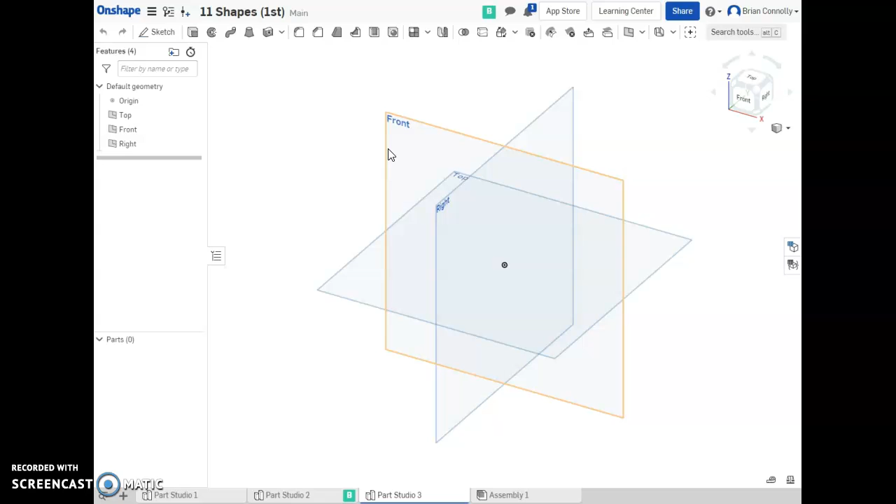So I'm going to start as we've done in the past by creating a new sketch, and I'm going to start from my front view and switch to my flat orientation so I can see it straight on. Then I'm going to just draw the base, and you don't have to make your entire part out of one sketch, one extrusion. Often, especially with a complex part, you're going to need multiples.

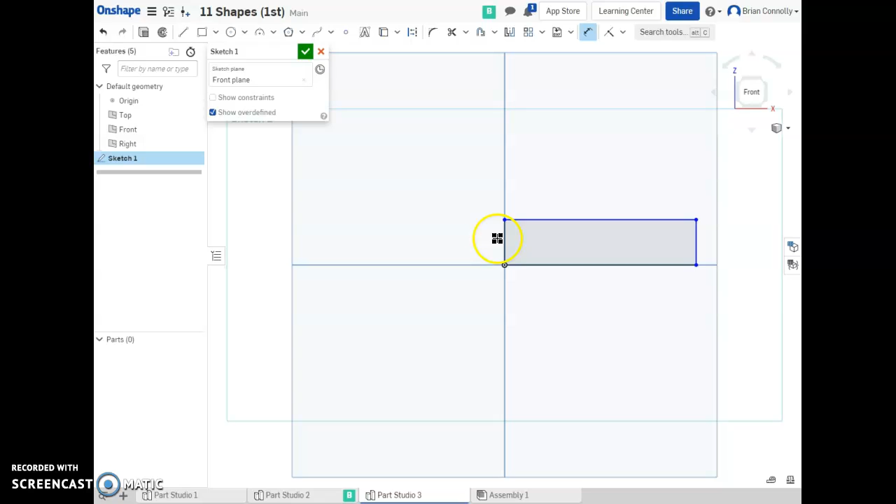And so I've got my rectangle for my base, and I know that the bottom is 0.5 in height. It's also 2, 4, 6, 8, 10 across. And so that is 2.5 inches according to my scale. And from here I'm actually done.

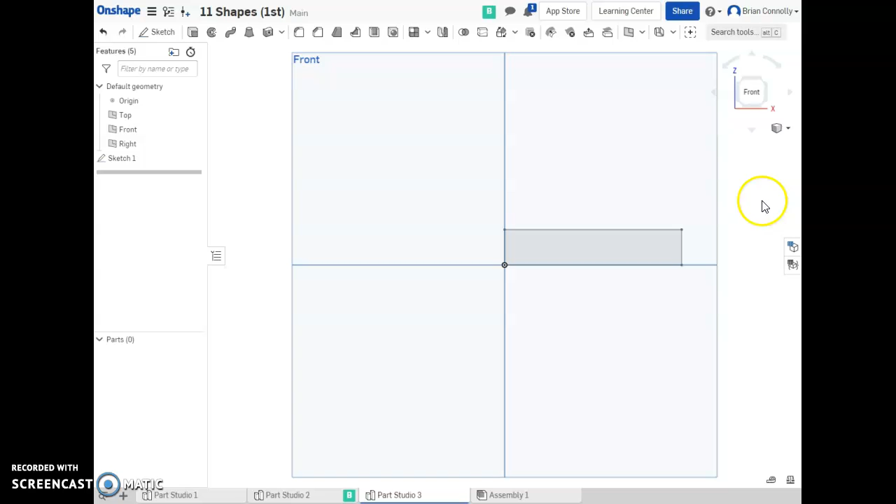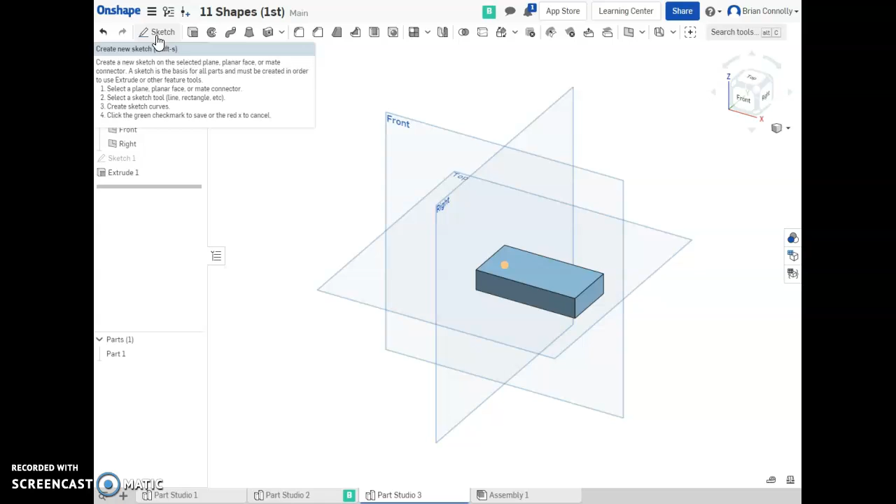So I'm just going to finish that, look at it at an angle, extrude, go, and double check that I need to go 2, 4, 5. So that's 1.25 right there. And so now I've got the base. And that part is the simple part. That is what we've already done on our other parts.

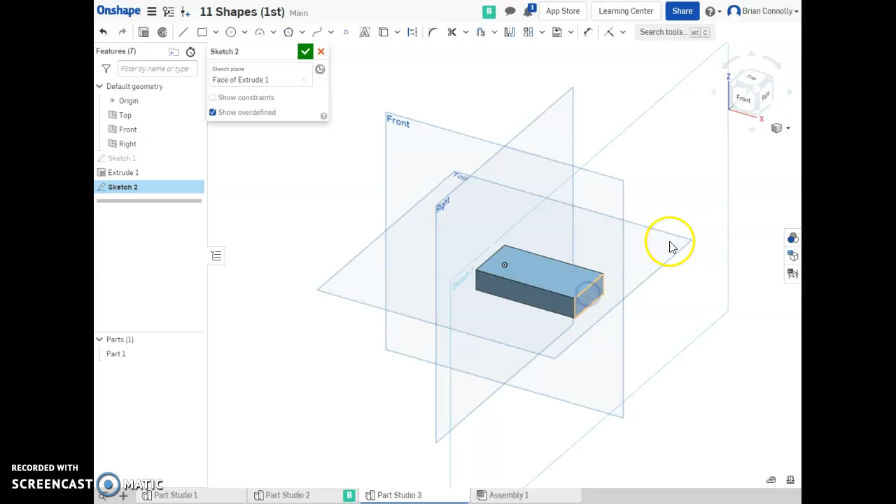The next thing that's kind of complicated is that we are going to actually create these rounded, one might call it a rib, these rounded shapes right here. And so I'm going to draw over here on this side, and I'm actually going to start with a rectangle, and I'm going to make it very obviously not line up over here. I can make my coincident constraint and line these two corners up right here, and now all I have to do is define the height.

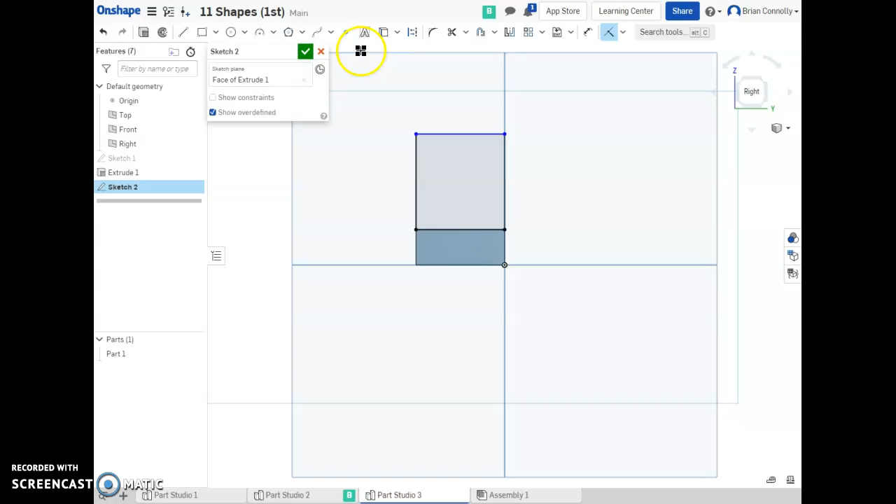And from here I can see, if I'm imagining a straight line over, it's 1, 2, 3, 4 squares tall. That's 1 inch, so I'll put in my dimension right here. And again, this isn't anything you haven't done already, but it is just a reminder, and it's a step that needs to be done.

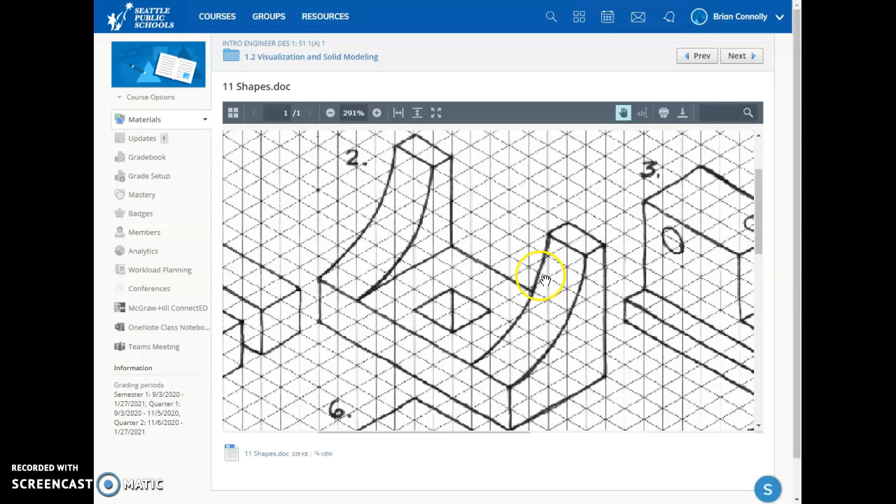Now, with all of these shapes in 11 shapes, you're asked to make a few circles, but the centers always line up with one of these grid lines. And so if we take a look, we see this circle looks to be about 1/4 of a circle. And in this case, it's 1, 2, 3, 4 squares to get to the center, and then 4 squares here. So we've got a radius of 1, and our center is straight up from this side and straight over from the top. And luckily, I already have a point right here on my sketch.

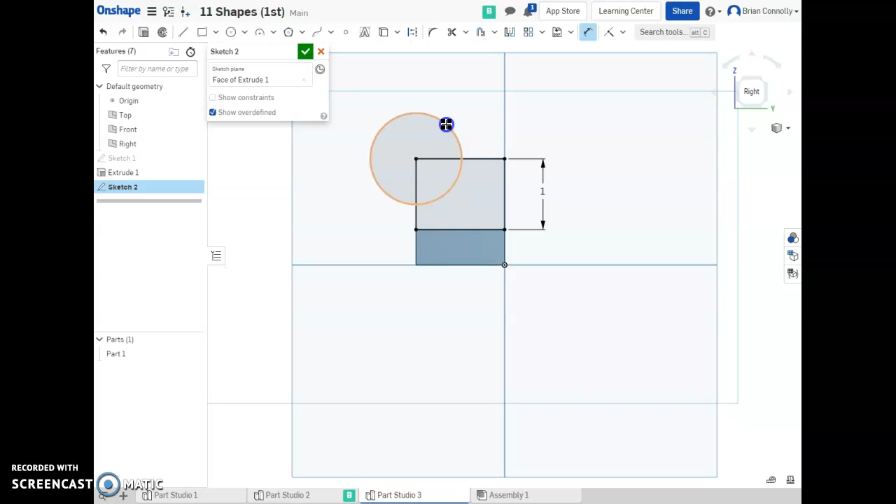So I'm going to draw a circle like this. And I know that the radius is 1 inch. So what I can actually do is type in my diameter, which is twice that. It's actually 2 inches because you take the radius times 2.

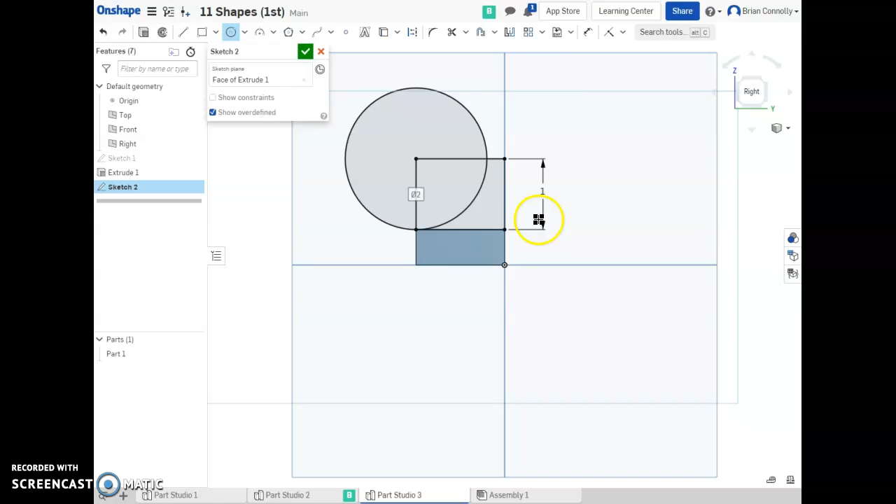Another option would have been, as I'm making those circles, I know where the center is, and I also know where that circle starts to curve back up, a place where it is tangent. So I could click here on this fully constrained thing. You can see my diameter is 2, and then the height being 1, so from the center to the outside of that circle is 1.

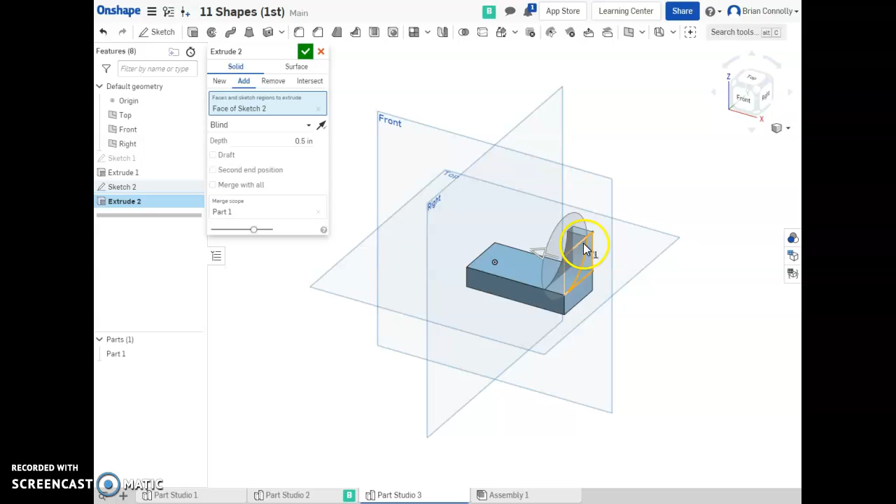And so from there, I can finish my sketch and extrude just this shape. Notice I didn't get rid of those extra shapes, and it's 0.5 and it's going the wrong direction, and I want to make sure that I'm also adding material. I want this all to be part of one part instead of being multiple parts.

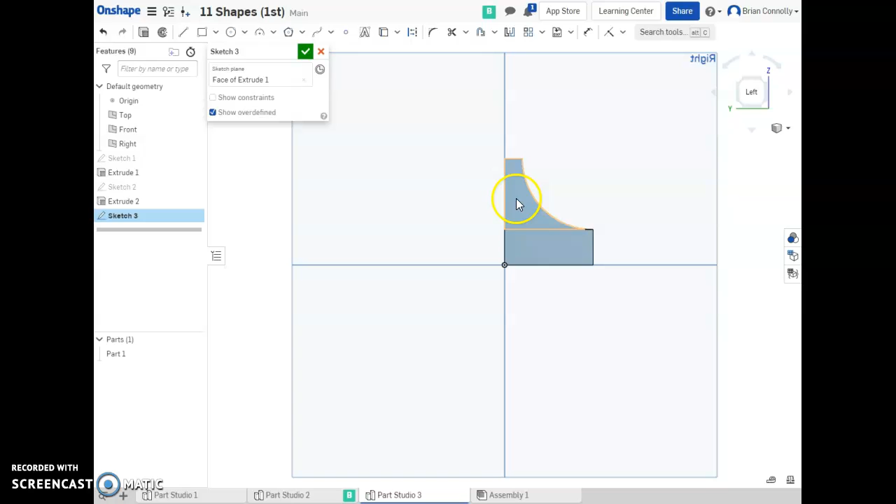Then from there I can see, okay, that's looking pretty good, but I want that same shape over here on this side. So I'm going to make this sketch over here on this plane, and whenever possible, I like to copy or move stuff from one sketch to another. And there's a tool for that, and that's actually called Use.

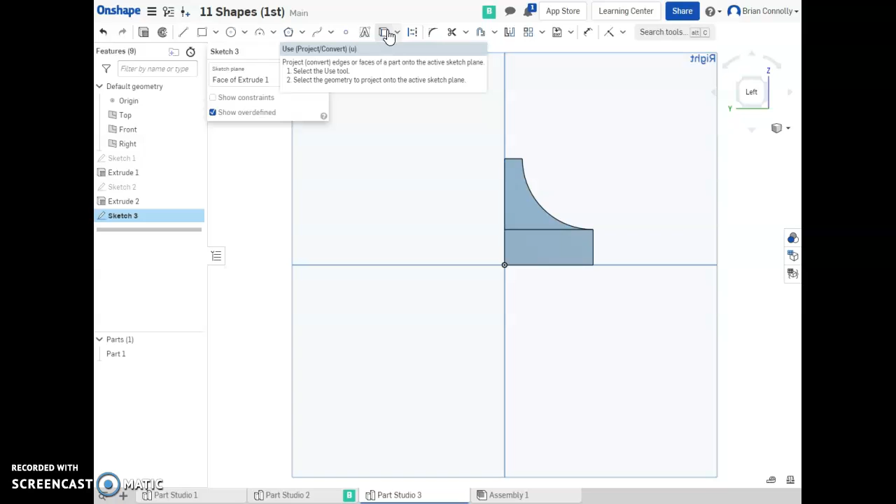So I'm looking up here in the toolbar, and I'm seeing that we have mirror and we have offset, and we've got construction. There we go. Use, project, or convert. So I'm going to use this Use or project tool, and I'm going to click on that shape on the other sketch that I've already created. It doesn't have to be part of just one sketch, it could be numerous sketches, but it's something that already exists but is not on my sketch plane.

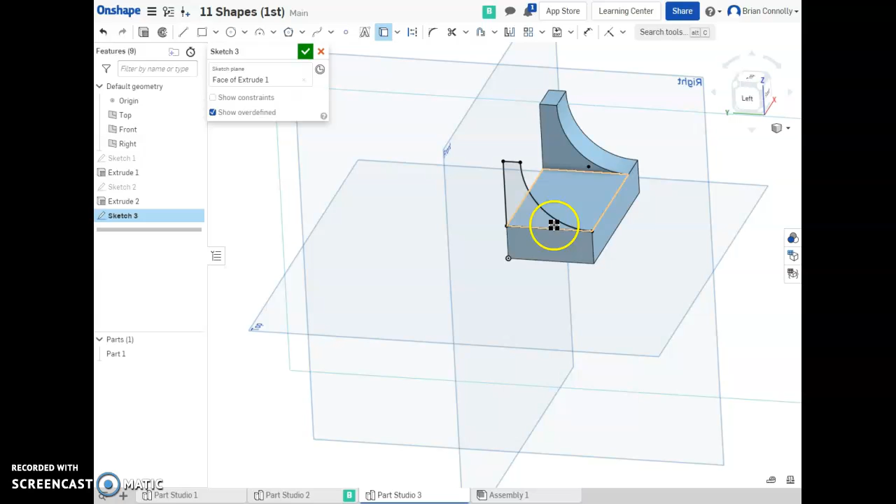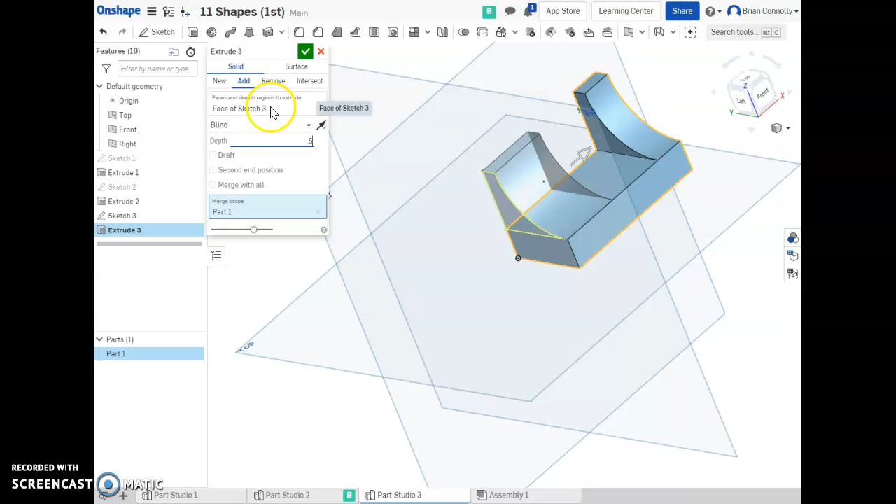Now from there, I don't have to add any dimensions. It's fully constrained because this is going to line up with something that already exists. So I'm all good there. I'm just going to finish that. I can extrude, and again, I want to see it at an angle. I want to add material, and I want to make sure that it is going the correct distance and correct direction. And notice I only had one shape on here, so I didn't have to click on it, but that would have been an option as well.

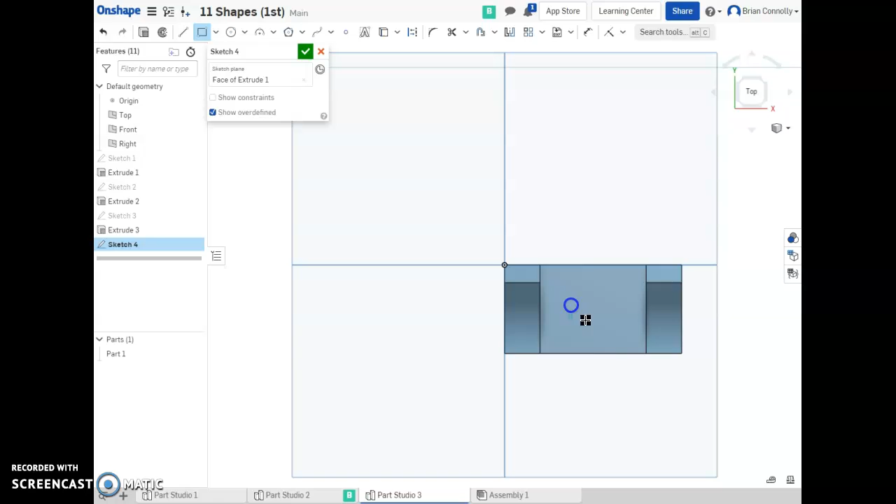So I'm taking a look. Now I've got these two ribs going on here. And then the last step is, of course, to draw a sketch right here. Nope, got to look at it straight on so it makes sense. And then not only dimension the size of it, 0.5 square, but I also want to dimension the location. So it's 0.5 from one side and it's 0.25 from the front.

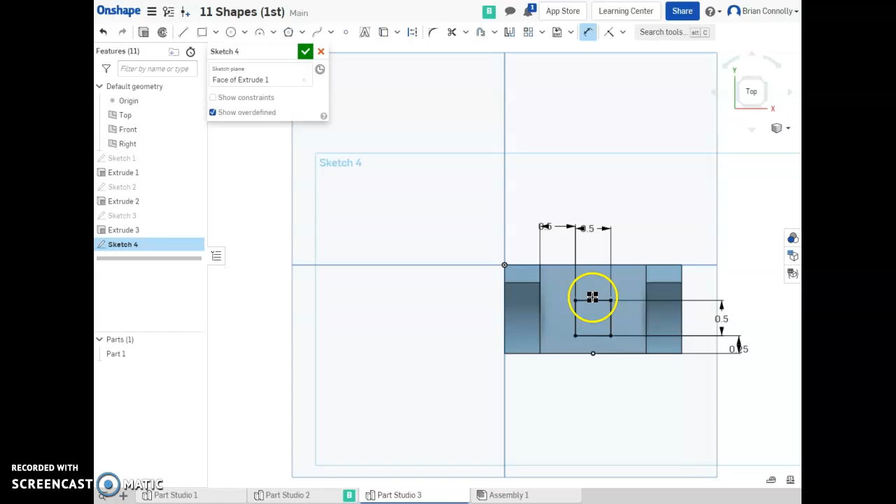So 0.25. And I'm putting my dimensions off to the side because I think it's just a little neater, a little cleaner. So you can see that it is fully constrained. All of my dimensions are correct. Finish that sketch, extrude, select that profile, make sure it's removing material this time. This time I'm going all the way through, so I'm going to select through all. That takes away my distance. And then I'm going to hit OK.

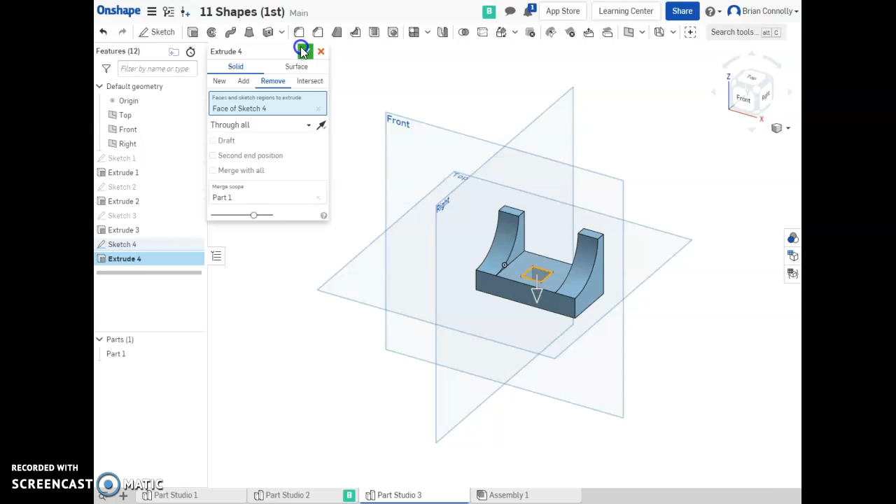And that was very quick, but as you work on this, you're going to get faster, and you're going to get better at this, and you're going to learn all these tools that allow you to very quickly, very easily make these parts.